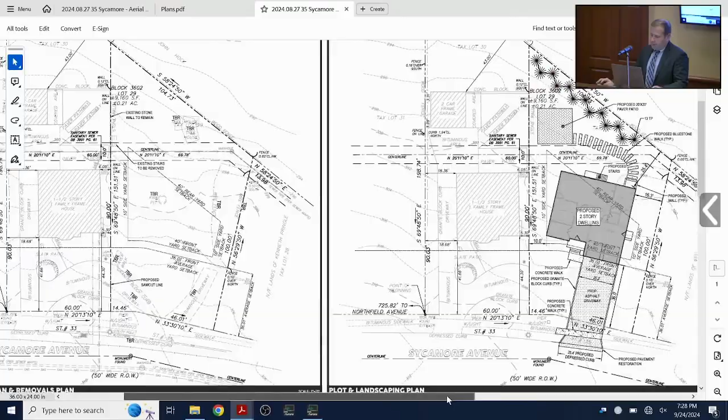As far as the proposal, moving to the second viewport showing what's being proposed as part of the construction, we are proposing a 2-story single-family dwelling with an attached 2-car garage in the front of the house facing Sycamore Avenue, with a driveway 2 cars wide and approximately 20 feet in width. There is a small porch and steps down to the sidewalk to the driveway. In the rear is just a landing and stairs from the first floor down to grade, with stepping stones and an on-grade paver patio in the rear yard on the opposite side of the sanitary sewer easement.

As part of the application and submission, we designed a stormwater or dry well system per the township regulations, and that's going to be subject to review by the town engineer as part of their review for grading and drainage.

One of the changes we made since the original submission was planting 13 arborvitaes staggered along the rear property line. We did as much as we could, but we can't plant within the sewer easements, so that's why the landscaping stops right there.

For relief on the property, we're asking for 3 items. One is front yard setback. The code for the R3 zone requires a 50-foot setback. However, there's a provision that if there are houses within the area, you should use the prevailing front yard setback, which is 36 feet in this case, 36.01 to be exact, but no less than 40 feet. So 40 feet is what governs per this lot and the surrounding houses.

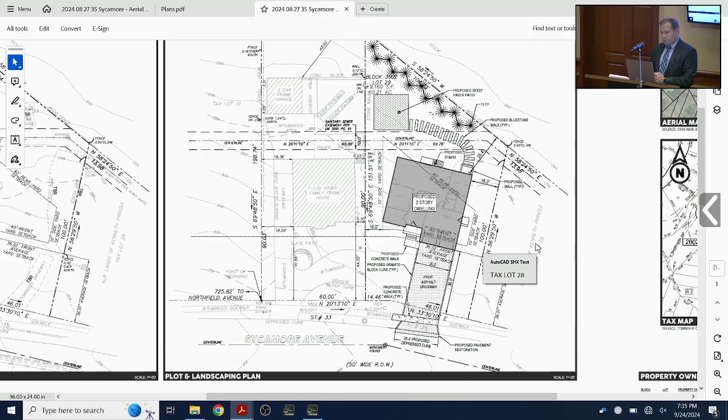So is it your testimony then that by moving it up as much as you have, in amending the application, it is in conformity with the other homes in the neighborhood, and though technically you might be able to move it up further, it would not look appropriate, is that correct? That is correct. So is it your professional opinion that where you have sited the house now would be the best location in terms of the front yard setback, is that correct? That is correct, yes.

And you're familiar with the site, correct? Yes, I am. And you're familiar with the objector, the Pearlson's property to the rear, correct? Yes, I am. And that property already has a pretty significant buffer of evergreen trees, correct? Yeah, I believe there's evergreen trees on the side of the back of the property along the driveway.

But even given that, you showed the board where you've amended the application based on communications I've had with the objectors' counsel, that the applicant has also agreed to install an additional landscaping buffer, correct? Correct, of 13 arborvitaes.

Okay, I have no further questions. Thank you very much. You're welcome.

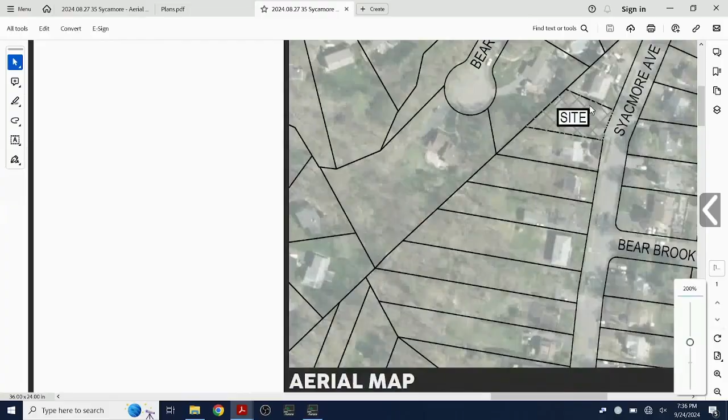Does anybody on the board have any questions for this witness? Could you point out where the objector's property is and where the current buffer is, and where you'd be putting an additional buffer? Yeah, so right now, it's right here, and I'll see if I could zoom in on the aerial as well. That might help. So as you see here, here's our subject site, and this is the neighboring property to the rear, and this is the evergreen trees that we were discussing.

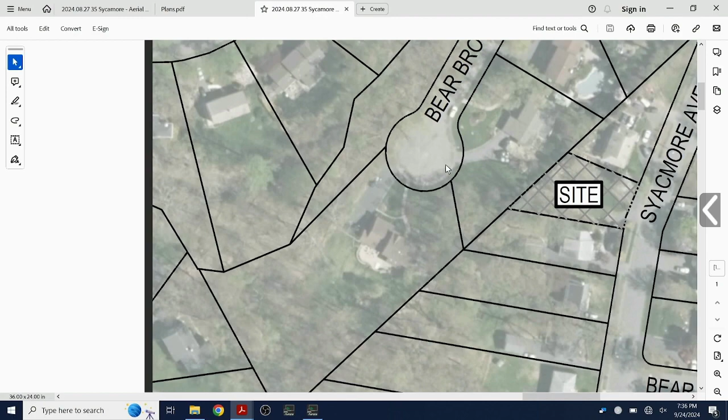So the house is going to be sited pretty much where it shows the site is where the house would sit. Actually, you know, I have another exhibit, I believe this was submitted as part of the exhibits. This is an aerial exhibit where we overlaid the house on the aerial. Did I do anything? There you go.

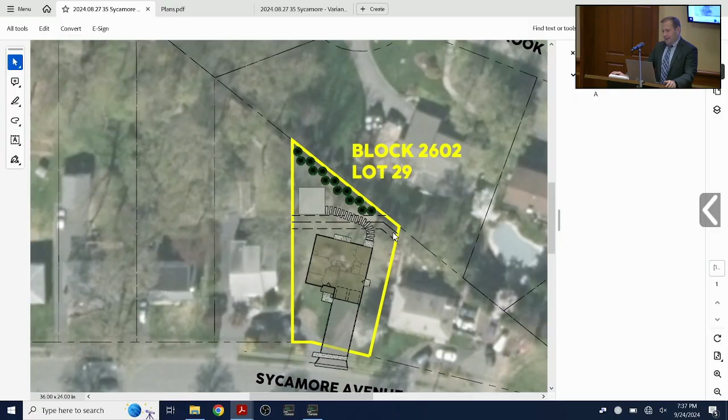And you can see how that is in relationship to the neighboring property behind us. So again, you have the evergreen buffer on the neighboring property, and then the evergreen that we're proposing on our property as well. Okay, can we get that exhibit back up? Oh, it's not up there? It's not, yeah. Just for the record, that we did submit that as part of the application.

Yes. And you prepared the exhibit that you're testifying to now, the aerial? That is correct, yes. Okay, and the yellow line shows the property line that's the subject of the application, correct? Correct, yeah. And maybe you could just show the board where the Pearlson's home is? Back up, yep. So this is the dwelling, and this is the lot.

And you wouldn't dispute that that's an irregularly shaped lot, correct? That is correct, yes. And it's an undersized lot for the zone as it exists today, correct? Correct, it's about two-thirds.

I got a question, Ed. Please. So just based on this aerial view, the house to the right is actually situated much closer to Sycamore? It does appear that way. So in theory, the house could be moved forward - I know you use the average of the lot, but this is sitting closer on the left side? So from the aerial, the numbers we got were from the actual survey, where the surveyor picked up the dimensions. Sometimes aerials can be skewed because of how they're taken - they're not directly taken 100% straight up. So the 36.01 came from the survey and the surveyor. Okay.

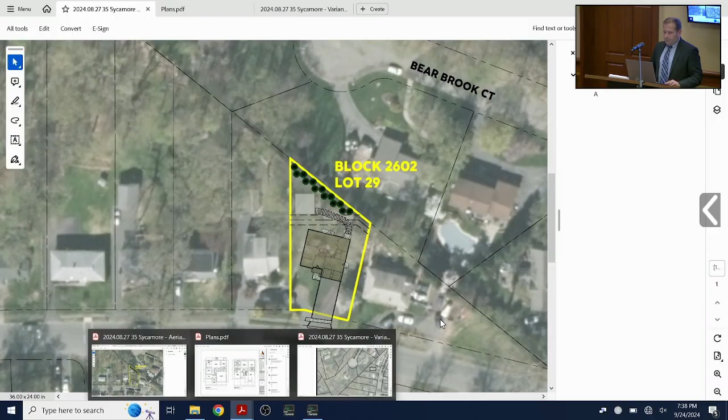Anybody else have any more questions from the board? Is anybody... oh, sorry.

Please, in terms of the surveys depicted on your diagrams, if I missed this, who prepared those surveys? That was prepared by Casey and Keller. Do you know when? Recently, within this year. I think the survey, it's there. There's a Casey and Keller Land Title Survey that was submitted initially.

It was prepared by Mr. Lanzafama. Is this the same survey? The one that I have doesn't show the dynamics, but that's who prepared the surveys, correct? That's who prepared the original survey and the subdivision as well, and they accurately depict what's there and what's intended to be proposed. Correct. Thank you, I have nothing further, Mr. Chairman.

Does anybody in the public have a question for this witness? Please come forward. Let me explain, we can question each witness, and at the end you can make a statement, okay? We've got plenty of time to do that. I'm leaving to pick up my daughter from the airport.

I just wanted to get on the record, even though I know it's confidential, I approve of the engineers. No, we just can't do that, there's a format. Well, good luck, so thank you. Sorry, so sorry. Not a problem, have a great, safe travels.

Hi, good evening again, for the record, Lisa John Bassa. Mr. Manillo, right? Correct, thank you. As was stated by Ms. Durkin, there was an application filed in 2019 before this board in connection with what was thought to be illegally created 35 Sycamore. Were you the preparer of that plan filed in 2019? No, I was not.

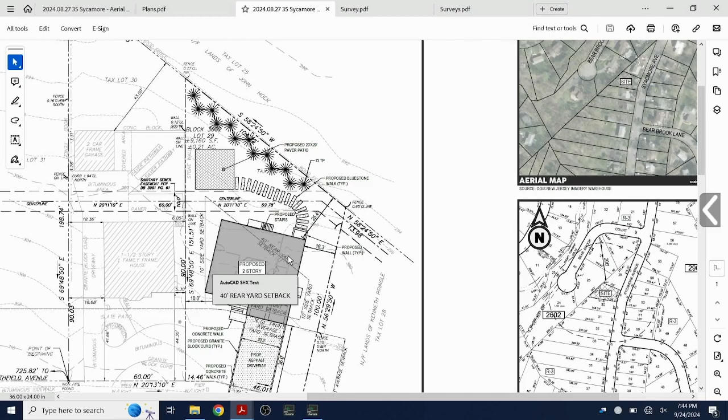So the dimension of the 25.4, can you point out where that is with your cursor? Yeah, so that's the top right corner of the house, that's the closest distance to the property line. As you move further away, the distance increases, where it's actually in conformance at the left corner. And there's a square box right outside the house, I believe referenced as a wall, what is that? That's a patio that comes out to grade. And what is the distance of the patio to the rear yard? I don't have that dimension, but it's probably roughly 20 feet.

So is the rear yard then less than the 25.4 being proposed? No, I believe it's still 25.4, it's measured to the actual building, not to the patio. What is the dimension to the patio? I could scale it for you, but I don't have that dimension right here. That would be great if you could do that. Yeah, and I'll report back to you on that. That's not a problem.

Okay, because it appears that there's actually a lesser rear yard setback than what is being shown on the plans by the dimensions. So it would be great to know what that is, what that patio area is. Do you agree with that statement, Mr. Manilio? To my recollection, I don't believe the rear yard setback is measured to the on-grade patio.

There is a requirement within your code related to patios. Are you familiar with that code section? There's a section that relates to patios that are attached to homes and their distances. Are you familiar with that provision? Not off the top of my head.

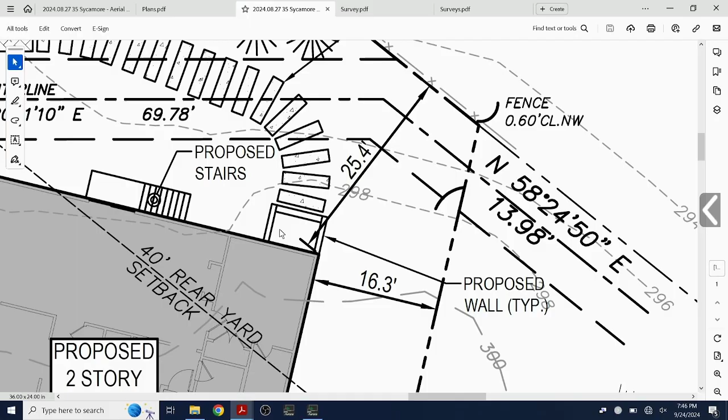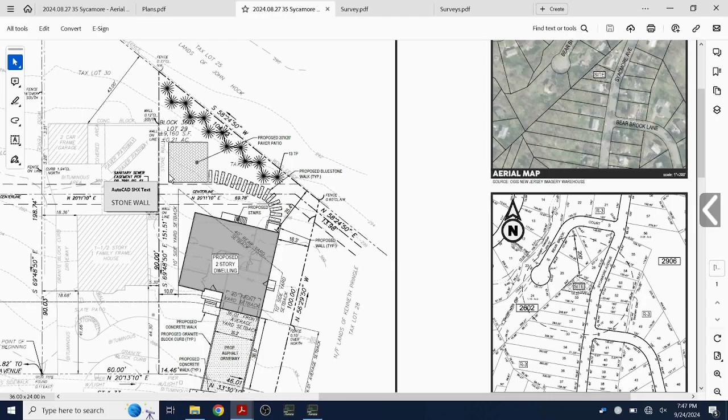On your plans, if you can zoom out again, there's another, it looks like another patio, that square block to the rear. That is correct, yes. That's a second patio on the property? Well, the first one's not a patio, it's really a landing that comes out of the doors, but you can call it as you wish. And how large is that patio? I believe it's 20 by 20. So that's 400 square feet? About. That is correct.

And what is the closest distance of the second patio, or the rear patio, to the rear? I don't have a dimension on the plans. I could get you that dimension and report back to you by the end of the meeting. And do you know the distance of the patio to the side yard line? I do not.

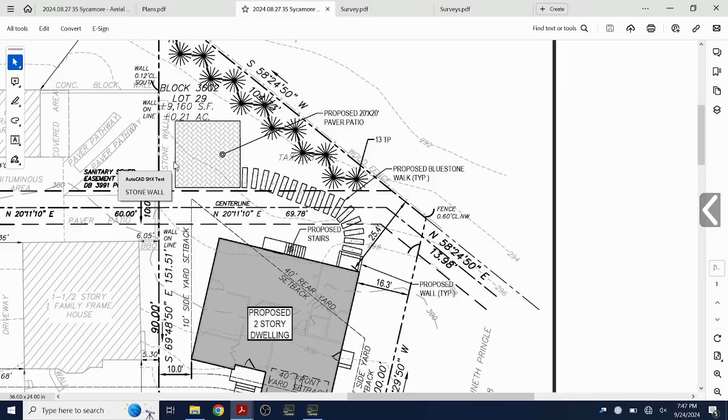Are you familiar with the township definition of accessory building? Off the top of my head, no, I don't have it memorized. The definition section of the township code states accessory buildings, and I'm quoting, subordinate building or structure on the same lot with a main building. Consider a patio. Would you consider the patio a structure? No. It's not a structure? No. What is it? It's on-grade material. It's like calling a driveway a structure. And you don't believe that a driveway is a structure either? No.

Rear yard. Let's go back to the rear yard. I believe that you stated in your testimony that the rear yard setback could not get larger. I don't recall saying that. Could the rear yard setback get larger from an engineering standpoint? Yes, the house could be moved forward. There's different ways that it could be increased. Could another alternative be that the house be reduced in size to create a larger rear yard? Correct, or, yeah.

And you also, I believe you also said that the house or the rear yard was in character with the surrounding properties, is that right? I did not. I said the front yards were. Can you flip to that aerial photo that you showed previously? Sure.

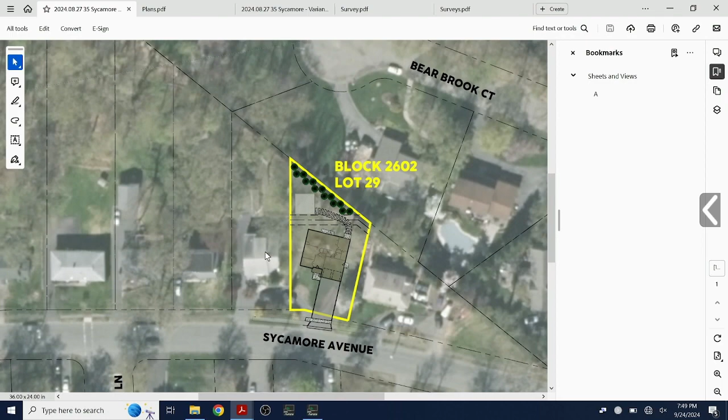I mean, it depends on how you classify character. I would say that the rear yard's in line with the neighbors to the left, or to the west. Then where you see this, the property does kind of turn, and that property line gets smaller as you get closer to the intersection of Bear Brook.

So the lots, just from the screen angle to the left, would you be able to dimension roughly how large those rear yards are from the principal building to the rear lot line? No, not off this drawing.

Based on just the view of the eye, does it appear that the existing development on those lots have much larger rear yards than what's being proposed in connection with the subject application? Yes, but I will also say that those lots are a lot deeper than this lot as well. Right, I would agree with that assessment.

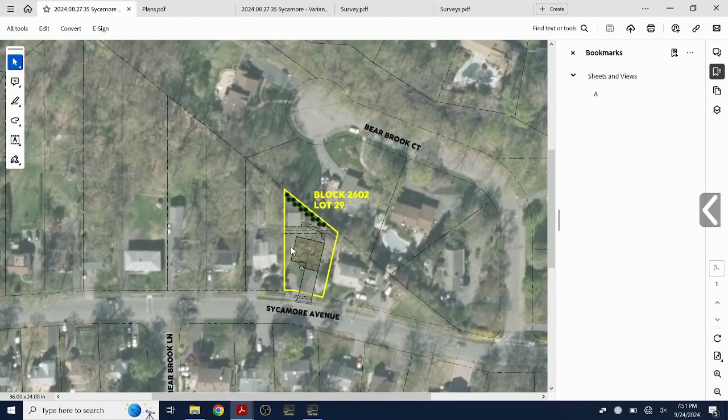And also, that would relate to both the principal buildings as well as any sort of accessory structures or patio features, is that correct? That the rear yards of those existing homes, the built-out homes, are larger than what's being proposed here?

I'm still confused. You said something about accessory structure and patio, I just want to make sure we're clear. I know you're not calling it an accessory structure, so I reworded it. Okay, referring to the patio that's being proposed in the rear of 35 Sycamore.

I'm not trying to be difficult, I just don't understand what the question is. I think you already answered that what is being proposed is not in character with the remaining rear yards. I don't believe I said that. Okay.

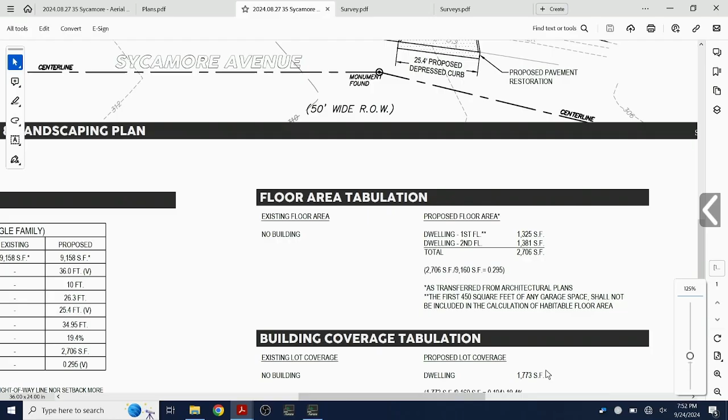For your building coverage calculation, I don't know if I heard you say what is the footprint of the proposed home, or how was the building coverage calculated? Let's get that for you. So we came up with 1773, and that includes all the roofed areas. Okay, so that was the total building coverage.

Correct. The patios and patio areas are not included, correct? That is correct.

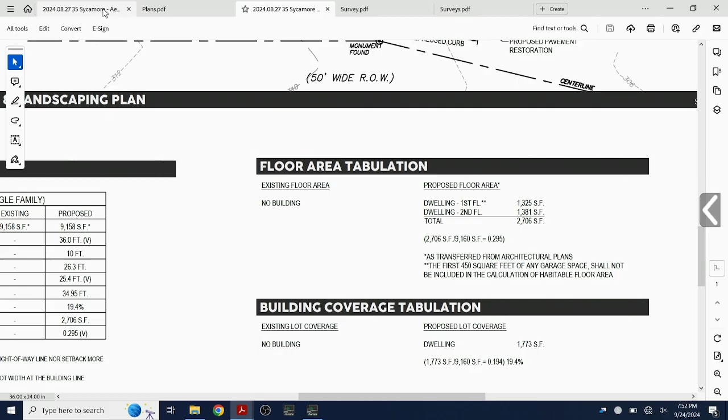The grading of the lot, can you just discuss generally how the grading is on site? Yeah, so generally the site right now grades from Sycamore towards the rear of the property, and it is going to be maintained that way in the proposed conditions. Do you have your grading plan? Yeah, I was just looking for my full plan here. I couldn't find it, I believe this might be it.

Yeah, so with the exception now, the driveway is grading towards Sycamore, and the remainder of the lot is still grading the way that it was before.

Is it, it's hard to read from here, but is it around a 308 elevation in the front, and then it slopes downward to around 294? That is correct. Okay, so there's a difference in grading of about 14 feet, which is existing and proposed, correct.

As part of the development, is any soil or soil-moving activities being proposed on site? Yeah, in order to build the dwelling and the improvements, some soil movement will have to occur.

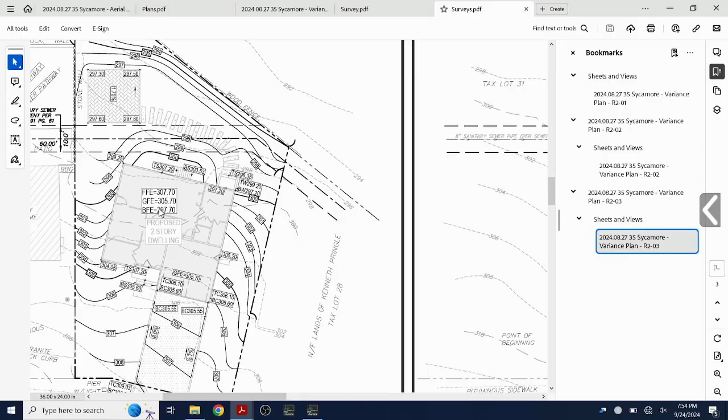On sheet 3 of your plans, it had some figures related to the soil-moving activities, that the lot area itself is 9,160 square feet, and that the lot disturbance is 9,461 square feet? Correct. So that includes also disturbance within the right-of-way.

Okay, so the entire site will be disturbed? From the plans, I don't know if you can see this line right here, this rear corner is not being disturbed. Okay, but the vast majority, including the right-of-way, is going to be disturbed? Correct, yes.

Is any soil going to be brought on site to construct the home? It actually should be an export with the basement, so no, there should be no import.

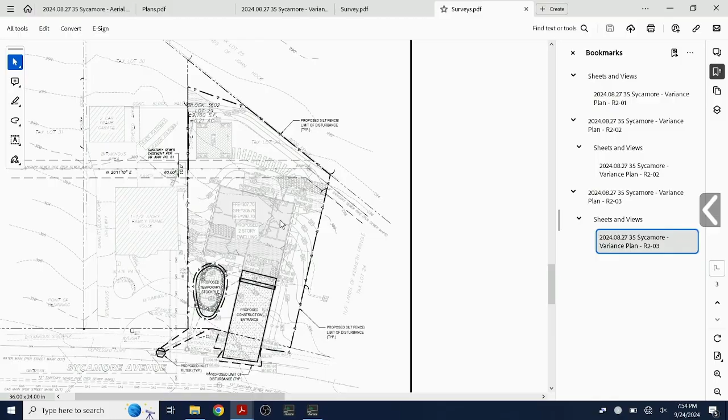Okay, also on your plans there was a calculation related to building height, that 35 feet is required, and the proposal is 34.95 feet. Correct. On a prior iteration of your plan, there was a picture on sheet 1.

There was a diagram that showed how the height was measured. It's missing from this plan. Is there a reason why it's missing? I don't know why it's missing, but we could definitely add it back to the plan if it is a requirement or a condition of approval, not an issue.

Do you know if the height was measured from current grade or after the soil moving activities occurred? It was measured pursuant to the town's requirement as far as average grade, I believe at the four corners of the house. So it's before the soil moving activities occur on site? To be honest, I need to look at the calculation, but I know it was done per the code, and that's up to the town engineer or zoning official to verify.

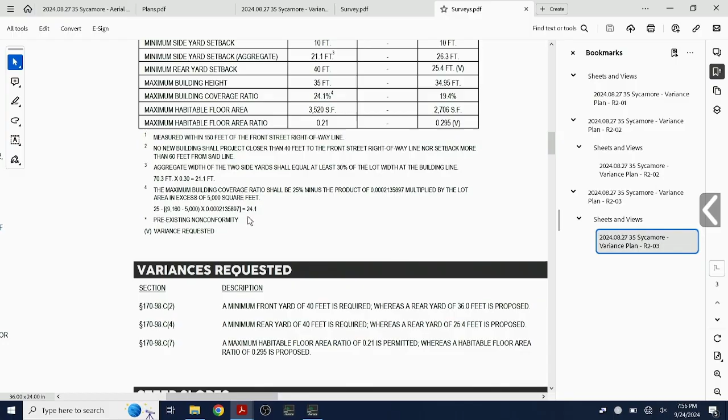Before the board acts on this, I would ask that a plan be shown how the height was measured, because per the township code, it requires that the highest point of the building be measured from the average of the original grade. Since we're so close to the maximum permitted height, the board and the public should know that answer before granting an approval.

I just want to state that we are proposing a conforming house as far as building height. If the board wishes, we have no issue showing those calculations and showing that it conforms as a condition of approval. If it doesn't work, we're going to lower the house to be in conformance. We're not asking for a variance on building height.

But there are plans on file with this board, and we need to make sure before the board grants an approval that there will be conformance with the maximum permitted building height, that the plans fairly represent what is actually going to be built out there. But that's a statement, not a question.

If I might interject, is there any testimony going to be offered this evening with regard to that height, other than this? No, we're not seeking a height variance. No, but I'm talking about the issue raised by the objector's counsel as to how it was calculated. So when I have a chance, I could take a look at the calculations in my files and verify, but it's not on the plans as far as how it was calculated.

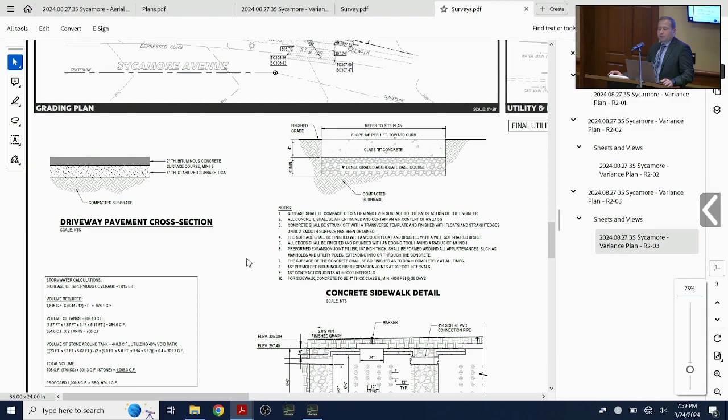Impervious coverage. What is the proposed total impervious coverage proposed in connection with the application? Give me one second. So again, I don't have the total. I have the increase from what was existing on the site, which is about 1,800 square feet increase in impervious coverage. I don't have the total. I believe that's not a requirement per the zone.

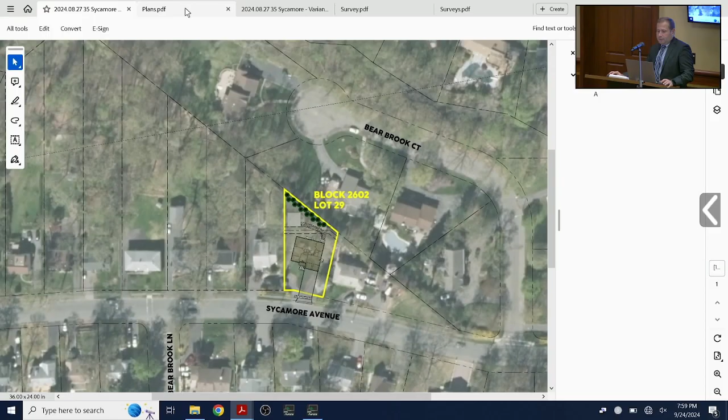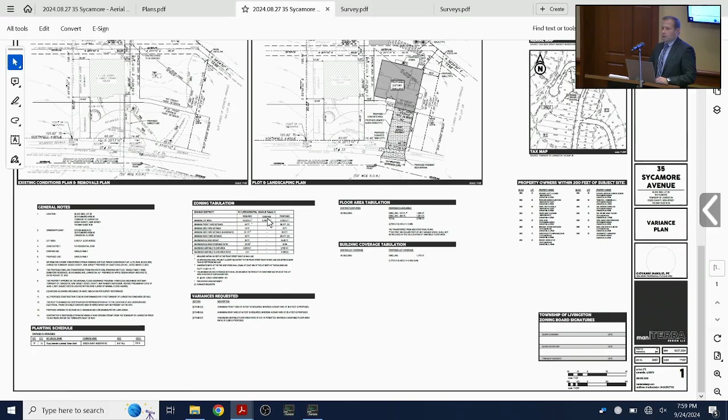Are you familiar with Code Section 170-72C that requires a drainage plan be submitted for any approved addition of impervious surface of 300 square feet or greater? Yes. Did you prepare a drainage plan? Yep, it's sheet 2. It has the drainage calculations and drainage plan, and we stated we would conform and be subject to review of the town engineer.

Tree removal, I just want to make sure this is accurate. Based on the survey, it didn't appear that there were any trees being removed, is that correct? That is correct. The landscaping being proposed, which is appreciated by the Pearlstons, I see it's 13 green giant arborvitaes, and it says 6 to 8 feet tall. Is that at planting height? That is a planting height, correct.

You also mentioned there was a dry well system being proposed for drainage or rain collection. Is there any maintenance issues with those types of systems? Do they get clogged often, do they have to have regular maintenance, do they have to be inspected? As far as clogging, no, not usually. All they collect is usually the leaders from the roof, so it's clean water as far as clogging is concerned.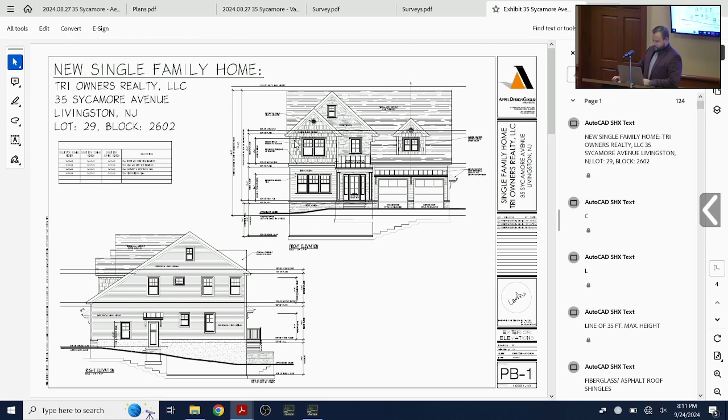Some of the changes on the elevation, you can't really tell on the front, but the left side of the house with the 2 large gables was pushed back to help reduce the square footage. These rooms are not overly large. How do you zoom in?

A 2-car garage at 21 by 20 is about as minimum as I would suggest for a 2-car garage. A study at 8 by 12 is not very large, just enough to maybe have a little home office. The dining room, also at 13 by 12, is not overly large. The rear area is larger, but width-wise at 14 feet, it's once again not a huge space. A guest room at 12 by 11. Upstairs, once again, the bedrooms are around 12 by 12, 13 by 13. The primary bedroom is 15 by 16, has a primary bathroom and a walk-in closet. Nothing here is, I feel, overly large or grossly exaggerated for space.

I work on a lot of multifamily buildings. These are about the same size as the bedrooms and primary bedrooms we do there.

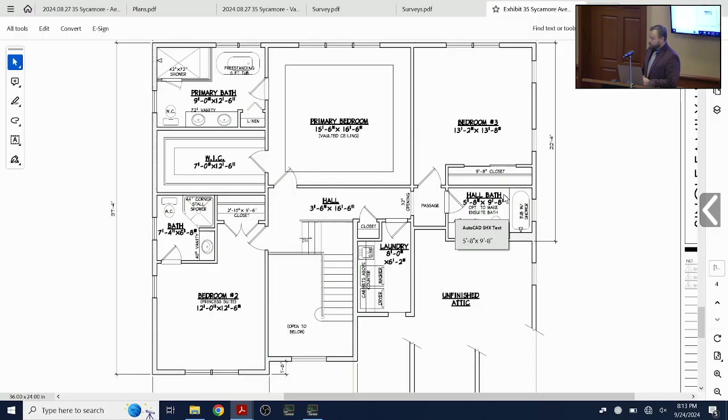Here's the rear elevation. As was testified, this is a 2-story house according to the town definition, and also would be considered a 2-story house per the International Residential Code, where it's measured from average grade. From that average grade line, you can't have your floor more than 6 feet above that, which we do not, so this is a basement and a 2-story home.

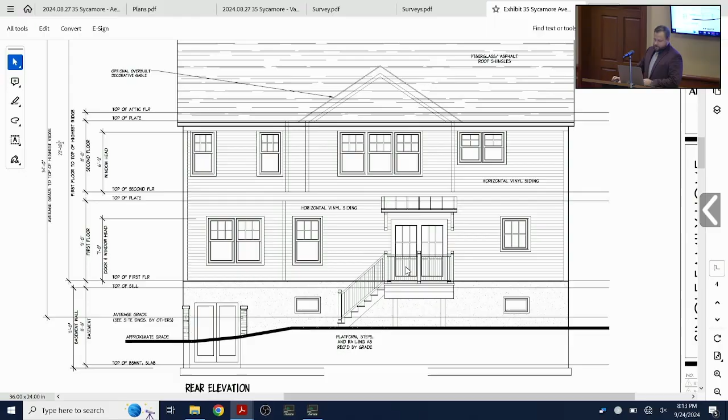To testify to the character, I do not believe this is out of character for the area. The homes to the left and the right, I believe from the front, are single story-looking homes, whereas this is a 2-story home. But I do not believe that this home is out of character for the area.

Excuse me, Ms. Durkin, is that document part of the package that's been submitted to the board, with the coloring in the house? Yes, it was submitted to the board. Is that in the most recent submission or the prior? This was — we've never updated this rendering, so it was with the prior submission. It's just to show the materials, correct? Correct, and you wouldn't be able to tell the changes we made from this elevation anyway. Would you be kind enough to resubmit that after the hearing, please? Not a problem, so that we have a copy, because I'm not sure it's in my package — maybe it just didn't make its way in. Okay, not a problem.

So in your professional opinion, the proposed home would fit on this lot appropriately, is that correct? Correct. And the home, once it's built, would fit in with the character and scheme of the neighborhood? Yes, that is correct. And from an architectural standpoint, you don't see a negative with this proposed construction, do you? No, I do not.

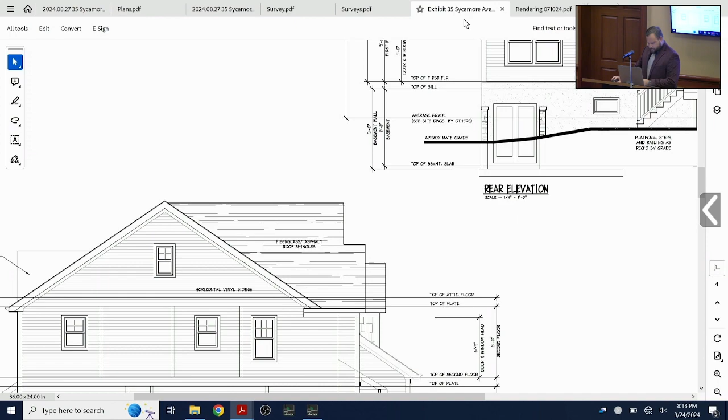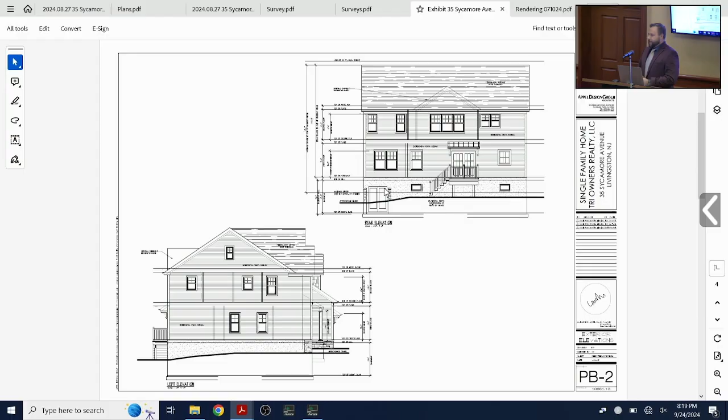Can you go back to PB2, please? So in the top picture there, towards the bottom left, is that a walkout basement or what is that? Right here? Yes. Yeah, it's somewhat of a walkout basement. We have to create an areaway, and that's what the walls are on the site plan, to keep back the grade so that you can walk out of the basement. So those are some sort of sliding glass doors or whatever? Yeah, it would be a sliding glass door, or French doors. We didn't get that far into picking things, so. Thank you.

Mr. Chairman? Yeah, just going back to the attic, I'm confused between these current plans and the ones before, because you seem to show the same heights for the first floor and second floor, but somehow the house has shrunk to 34 feet from 34 feet 2.5 inches, yet you've increased the distance from the first floor to the highest point of the ridge. Did we? Yeah, because it was 29 feet 3.5 inches, and now it's 29 feet 10 and a half inches, and I don't know why that's different. Before it was 29 feet 3 and a half.

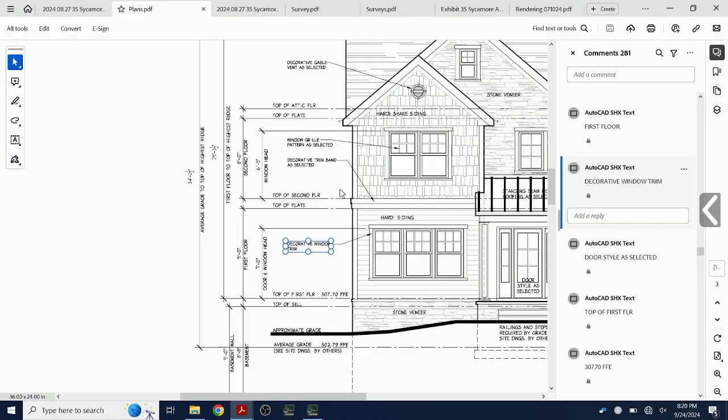Oh, that's just, I'm not sure why that is, because we did not increase roof heights or anything. In fact, by shrinking the building slightly this way, that should have reduced, not gained, so I don't know exactly why those two are different. Because in either case, you're talking about a roof where the height from the ridge to the attic floor is anywhere from 10 feet 2.5 inches to 10 feet 10.5 inches. You're almost talking like a stand-up attic.

Well, you got to understand there's collar ties in there too, so understand those are going to cut down the head height. We don't have a stair up to that attic. It's not, we don't have one.

But one could be added, and you do have an unfinished attic on the second floor that could easily, obviously, you would have the height now of double height. So because you have the height of the second floor, then also going up to the attic... well, it wouldn't be double height. You're stuck with the roof line. You can't have a double-heighted space in that room over the garage.

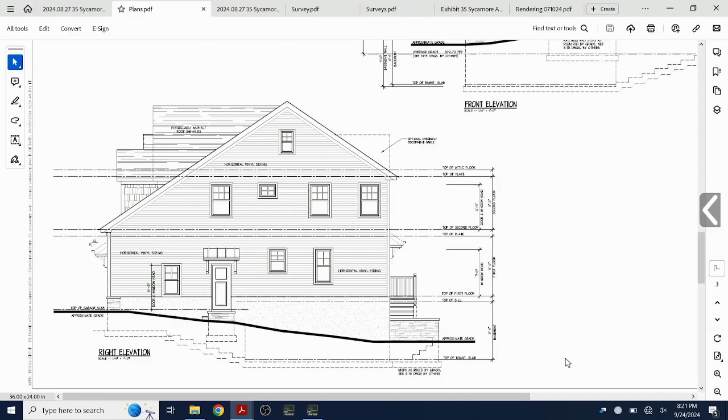But couldn't the only reason the roof is that high also be because you have the double gable in the front, with that window? Without the double gable, we could lower the height. The window is just into dead attic space. It's just put there, so it's not a blank elevation right there. I mean, that window could be a little gable vent or anything like that. It was just decided to do a window.

Once again, this is not a habitable attic. There's no egress stair up there. There's nothing going on up there. I mean, if you want to talk about possibilities, anything's possible. I can't testify to what we didn't do.

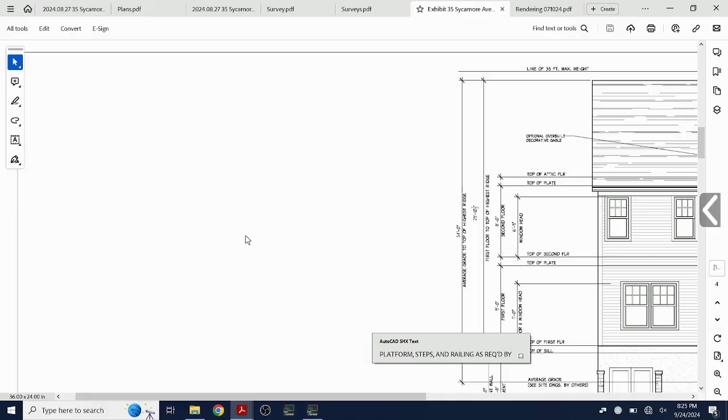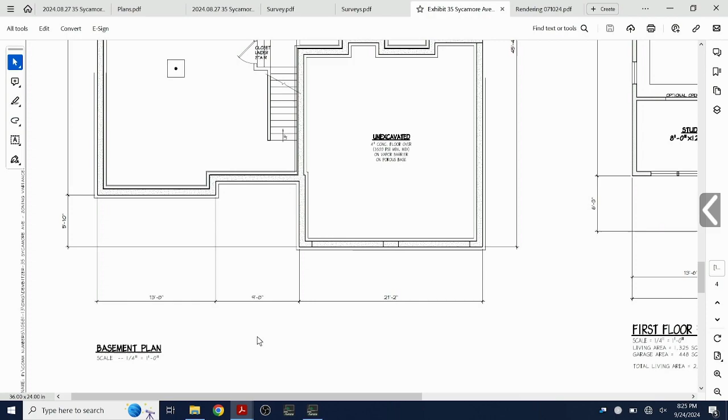No, but it's probably still around 1,300 square feet. Because it's not underneath the garage, which is 448 square feet, but it's under the rest of the dwelling. So the basement area being shown right now is approximately 1,300 square feet. Somewhere around there, yes.

Do you know the ceiling height proposed in the basement? Yes, 8 feet, or 8'8" to top of sill. Given the height and size, is this an area that can be used for a TV room, a workout room? It's usable space, absolutely, yes.

The first floor plan, please.

I believe you went through the rooms, but can we just go around again and identify what the rooms are? Sure. As you walk in the foyer, to your left is a study. Right behind that is the dining room. Behind that is the kitchen, which is open to the family room. Beyond the family room is a guest room with its own private bathroom. Below that is the two-car garage, which you gain access to the rest of the house through a mudroom.

And with the garage, based on the township's calculations, there's a portion of that garage area not included in the FAR calculation, is that right? That is correct, 450 square feet, I believe. It says the first 450 square feet, so anything beyond that is included. So those 450 plus the 1,300 in the basement, they don't count towards the habitable area included in the FAR calculation? I believe the basement does, I thought. Didn't it? Does it? It does not? No.

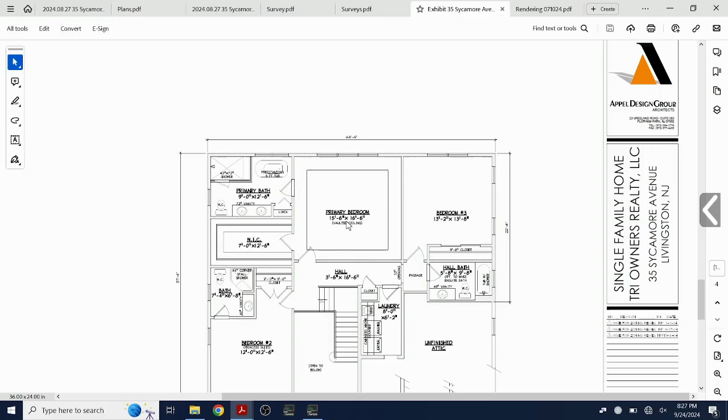And then if you can move on to the second floor plan and walk through those rooms again? Sure. As you come up the stair from the two-story foyer, right ahead you'll have bedroom number 2, which has an ensuite bathroom. To the right of that is the primary bedroom with a primary bathroom and a large walk-in closet. To your right down the hallway is a laundry room, and then bedroom number 3. And then at the end of the hallway is a hall bath.

And you're saying it's bedroom number 3, but in fact, how many bedrooms are being proposed? Oh, there are 4 bedrooms. This is bedroom number 3 on this floor, with the guest room on the first floor being the 4th bedroom.

And the last reiteration of the plan filed with the board, I want to say it was August 27th date - what's being labeled now as an unfinished attic, that was previously a bedroom with a walk-in closet, is that correct? That is correct.

And it was relabeled for what purpose? To reduce the square footage of the house, the livable area of the house. But the house itself didn't actually shrink - it was just based on math, based on the township code, is that right?

No, the house did shrink some. We reduced the front setback, the front bedroom area. I believe we brought this whole area in 2 feet. I don't think we brought the back in at all - I think it all was right in here. This laundry room got a little bit smaller, so we did reduce the overall footprint slightly.

I'm sorry, the area now called unfinished attic, which was formerly labeled bedroom number 4, did that space reduce in size? Somewhat, because of just getting rid of the room, the roof slope and everything like that. It did and did not, kind of not. I forget how big that bedroom was - I think it was 200-something square feet, so that came out.

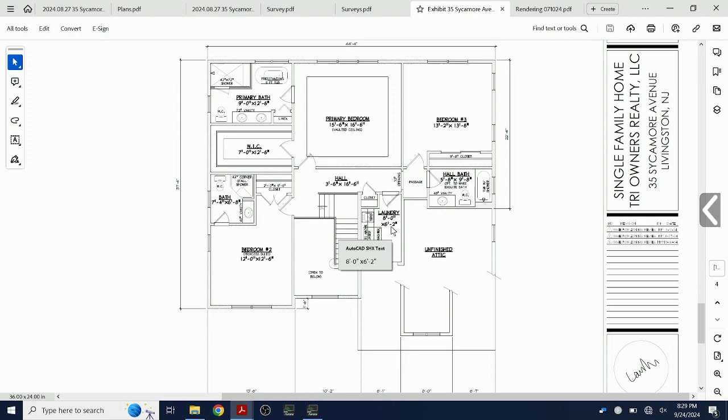And up until the time you presented this exhibit today, that unfinished attic area actually qualified as an attic under the township code, is that correct? Correct. And why was? We had a door. What's the difference? We had a door going into it, so it was part of the second floor - you could just walk right into it. So we got rid of that door and put an access hatch to the attic.

And from an architectural standpoint, would it be easy to convert it back and have a door? Yeah.

Would the applicant, if the board were inclined to even grant this application, be inclined to, as a condition of approval, not put another bedroom within the house? Well, it wouldn't be so much as putting a bedroom, but you put a bedroom in there, now you're over your FAR. Right, but a lot of things happen in houses without boards knowing about it. True.

So I'll take that as a no. What do you, as a, if the board imposed a condition that there wouldn't be another fifth bedroom, is that something the applicant would agree to? I believe so. He allowed us to remove it now, so I don't think he could put it back. We couldn't put it back as the architects without coming back to the board for more square footage.

And there's also, aside from this unfinished attic on the second floor, is there also another attic? I just want to make sure what we're trying to get here, because the zoning is about the restrictions of the front yard, backyard, front setbacks. So why are we going in detail? Because there's also a requirement of habitable floor area, and that's precisely the questions I'm asking. He's already shown what the habitable floor area is, right?

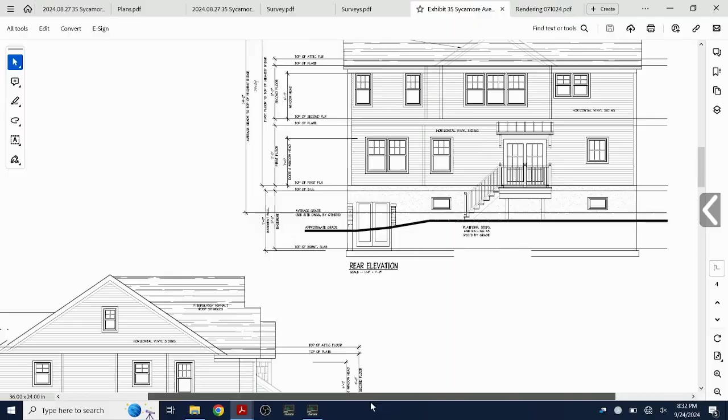Well, there would be an attic above this floor because of the roof geometry, but there's just an access hatch up there to get up to the attic. Two attics in the proposed house? It's one big attic, but you could call it two because you're seeing them on two different levels. Let me show you. So the attic located above the garage at the second floor would be this space right here, and then the normal attic of the house would be this space up here.

Would it be possible to remove the top floor that's proposed? You mean up here? Yes, without going to a flat roof? No, if you want a flat roof house, then yes. I'm assuming there's a way to redesign the roof or take off some of the massing on top if there's another attic space. Of course. Yeah, okay.

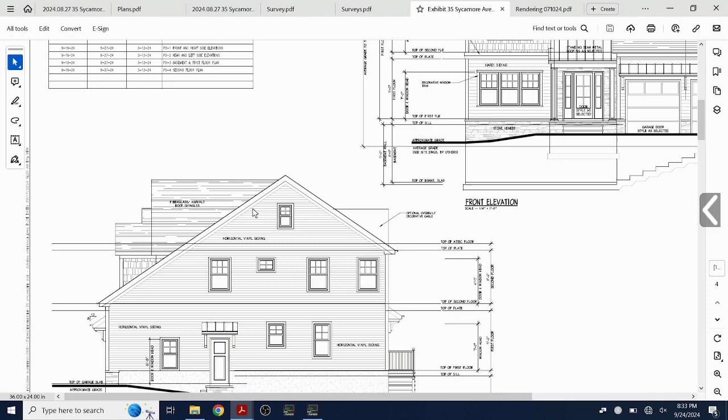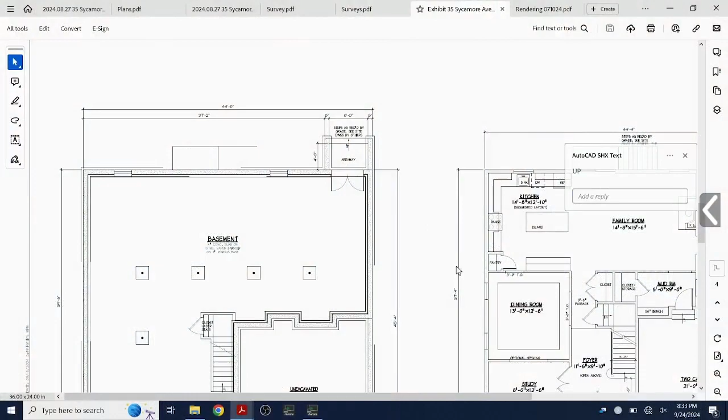And then a question was thrown your way related to the patio area. There's a patio area - I'll talk about the one that's attached to the house. Areaway. I've never seen us call a little areaway out of a walkout basement as part of a patio. You're not having a party there, you're not putting a chair there. That's what the engineer called it, so that's what I was referring to.

What is an areaway? It's just a small space that allows you access. Is there pavement or any type of pavers there? There's got to be - I mean, I guess there doesn't have to be. You could walk right out onto grass. You don't have to have any kind of pavement there.

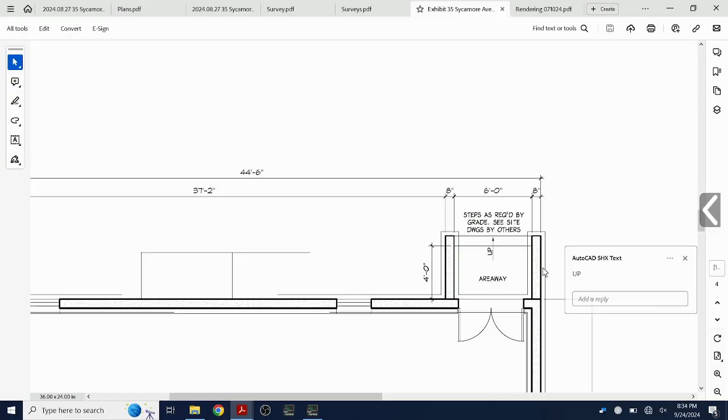Excuse me, as my colleague said, if there's a reason for these questions about the patio, let's move on - is there a reason for asking about the patio? Yeah, it related to whether the rear yard setback was measured from the area I'm referencing or not, because there's a provision in your code stating there shall be a rear yard of at least 40 feet, except that an attached sun deck or patio may extend into the required yard for a distance of 10 feet. If that was in fact a patio, it's in a yard that's less than what's permitted, so I would submit to this board that the rear yard setback requirement is measured from the patio. Okay, so we'll take note of that. Thank you.

You made statements related to the character of the neighborhood and the homes. Have you done any survey related to the square footages of the homes on Sycamore, particularly on the west side? That's not mine, I can defer to the planner, but statements were made by this professional that it was in character. I was just talking about the aesthetic of the elevation, not square footage. Materials, colors, look of the house. Okay, I'll reserve that for the planner's comment.

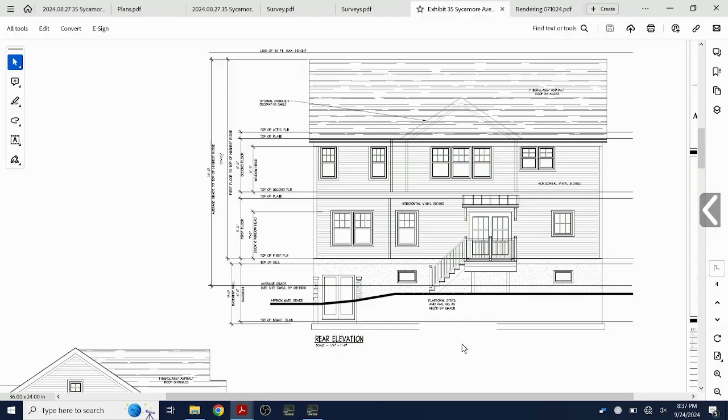Does anybody else in the public have any questions for this witness? Anybody else on the board? Okay, I turn it back over to you.

I apologize, is it possible that we can take a 5-minute break? You're already running much late, Mr. Chairman, I'll give you that. Okay, we're in recess for a few minutes. Jackie, we should have a time limit on the case going forward.

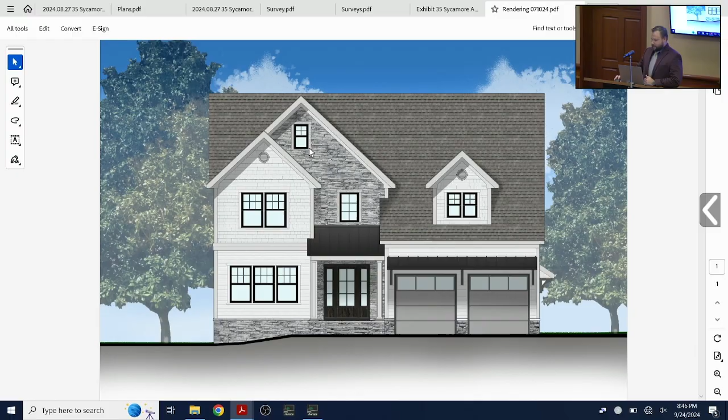We could delete this little dormer, lower this garage roof, or maybe change it to a gable, and get a wall here to reduce the massing. This massing can be reduced if we change the pitch of the roof, you don't want to make it too flat, but we could play with the pitch to help reduce that. We could take out the windows around the sides up in the attic and just do gable vents so it doesn't look like there's a habitable, livable attic up there. So yeah, we're open to that.

What about the restriction on the height? We could come down, if we change the pitch of the roof, we could easily come down a foot and a half to around 33.6 or so, to make sure we are under any ordinance height.

Okay, thank you. Anybody want to make a comment on that on the board? I guess the only other comment I would make, that's great, thank you for reducing the height.

My only other concern would be, depending on what you're talking about doing, that space that says unfinished attic, as you said, things could be done. Would you also consider deed restricting that area so it can't ever be living space? I don't own this, I can't deed restrict anything, that's up to the owner. What we've agreed to is a condition on the approval of 4 bedrooms.

Like I said, you can't, and when we get a building permit, it's based on those plans. I'm talking about the future, because that room could always be changed. But they would have to come back before this board, they would have to get a permit, or that would be pretty difficult. If you're doing work illegally, yes, you're doing it illegally, correct. No one could stop that.

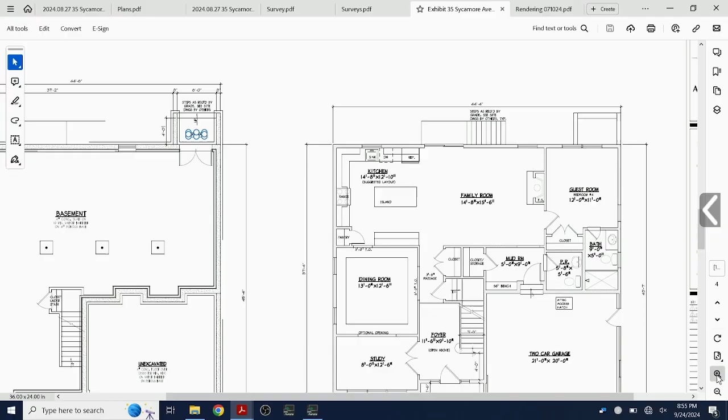Okay, thank you. Anybody else? We're good? I think that's pretty clear.

What about pushing the whole house farther forward? Does anyone have an opinion before I chime in on moving the house a little further forward? Well, I think it makes sense for it to be equal with the neighbors—it looks funny if it's pushed out. It'll increase things—there's two neighbors, one's a lot further out than the other.

The question is whether you set it in the middle between those two setbacks as opposed to the neighbor to the left. I want to make sure my fellow board members understand that'll change the front yard setback to a greater number, but if we feel it's giving more relief by moving the house forward, then I think that's not a bad idea. Everybody, yes or no? Okay, that was a good point.

Okay, thank you so much. Thank you very much, Mr. Chairman and members of the board, thank you very much. We'll see you in November? Before that, wait—

Just want to get a sense of when we can expect the revised plans, because I've made the decision to send this application to the town's planner so that we can get a review memorandum done, so that everything—the variances—can be articulated and opined on by the town. I know we do have a zoning denial letter, and we also have the engineering memo, but I think it would be a good idea to have a planner's memo.

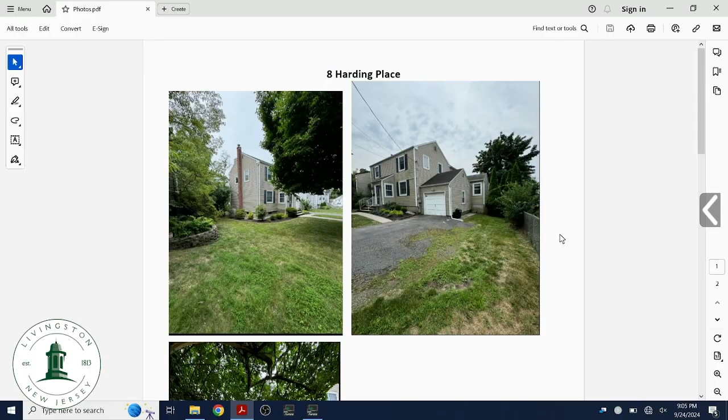We're just adding 450 square feet, just the master bedroom above the garage. The ratio, if it changed, I'm not sure. Yeah, the habitable ratio is...

3.04% variance - proposed is 33.04, required is 30%. And your existing lot size is undersized for this zone? I don't know the exact threshold, but I think the lot is 7,292 square feet. It's on the plans. So you have an undersized lot, and you're going a little bit over on the habitable floor ratio, right?

Yeah, that's correct. And if this was a full-size lot, you probably wouldn't be coming before us for this, is that correct? Yeah, correct. Okay, thank you.

Does anybody have any questions for this witness? No. Did we say it was 7,501? I just looked it up - I saw 7,500 on the building area calculation. Okay.

Your son? Yes. Would you confirm that, in your opinion, there's adequate capacity here if you make these changes to accommodate what you want to do? Yeah, and that it's consistent with the neighborhood. And that any benefits granted to you by approval of this outweigh any detriments? There are no substantial detriments to anything. No. Thank you, that's all I have, Mr. Chairman.

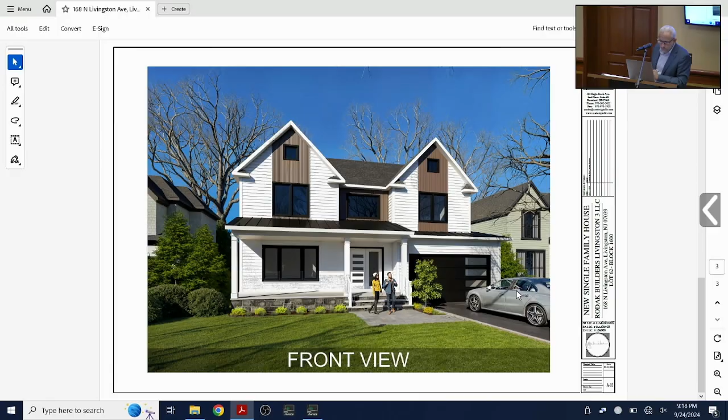Now, regarding the building height, we are required by code to be 35. Our height is 32.20, so we're almost approximately 3 feet below the required building height. I want to also mention that we have the first floor at 10 feet ceiling, the second floor at 9 feet, and the basement at 9 feet.

I would like to mention that the basement is not accessible to the outside. We don't have a walkout basement. It's just enclosed space.

Lastly, I'd like to mention that the attic, there is no livable attic, just unfinished space accessed by a pull-down stair. No access, no egress to the attic.

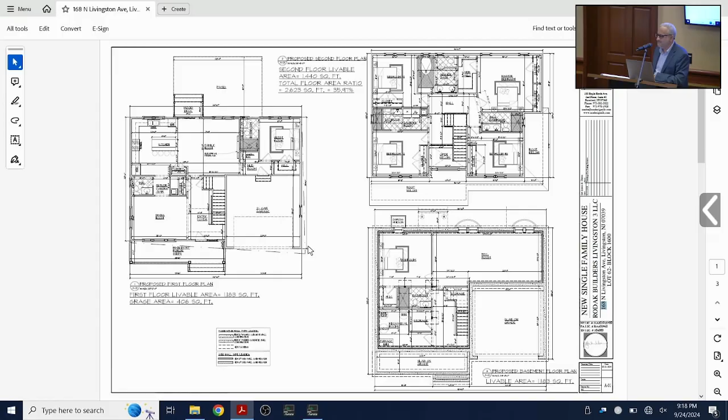That's it. And one quick question regarding the attic itself. In your expert opinion, it would not be habitable, correct? Correct, yes. Can you walk us through why, aside from the fact that it's a pull-down?

Can you walk us through why it would not be habitable? Because we don't have egress access to that. There is no stair that goes up except the pull-down stair. That is not an access to the attic.

And what would you say the pinnacle height is within the attic? The attic has a flat part, there is a collar tie. The collar tie is 5'7", and the height from the attic floor to the collar tie is 7 feet. Okay, but it's just limited to that one specific middle area? Just to the 5'7" in the center.

Terrific. I have no further questions for this witness. Anybody on the board have any questions for this witness? Anybody in the public have any questions for this witness? Okay, back to you, Mr.

Posada. Great, thank you. I'd like to call my last witness, my planner, Nick Graviano.

Would you be kind enough to state your name and spell it, please? My first name is Nicholas with an H, last name Graviano, G-R-A-V as in Victor, I-A-N-O. Mr. Graviano, do you swear or affirm that any statements you make and testimony you give to the board this evening will be true, accurate, and complete? I do. Please consider yourself under oath. Thank you.

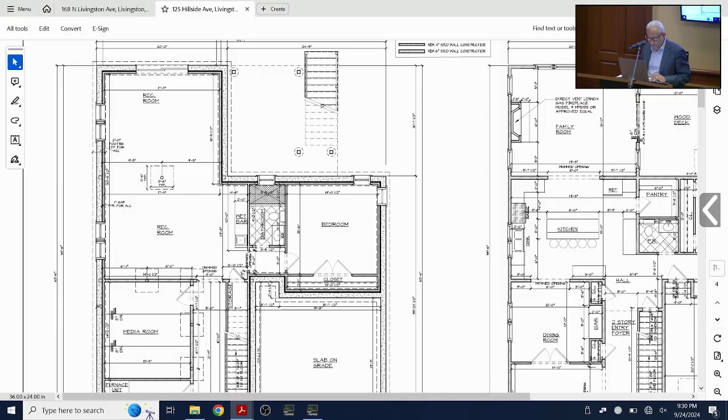Going back to the first floor, I forgot to mention that there's a wood deck with a sliding door from the family room and the guest room, and the wood deck has a staircase to access down to the grade.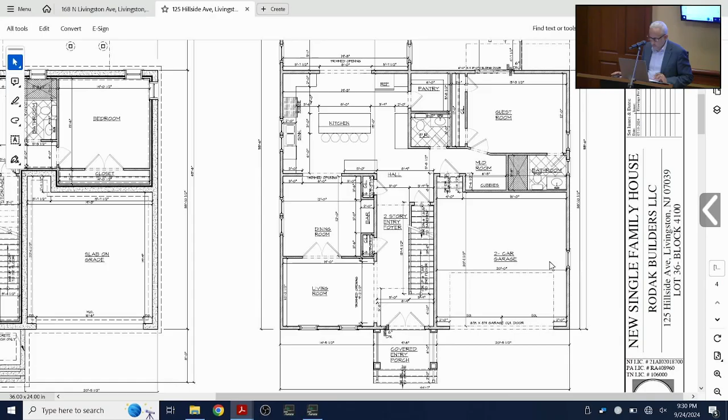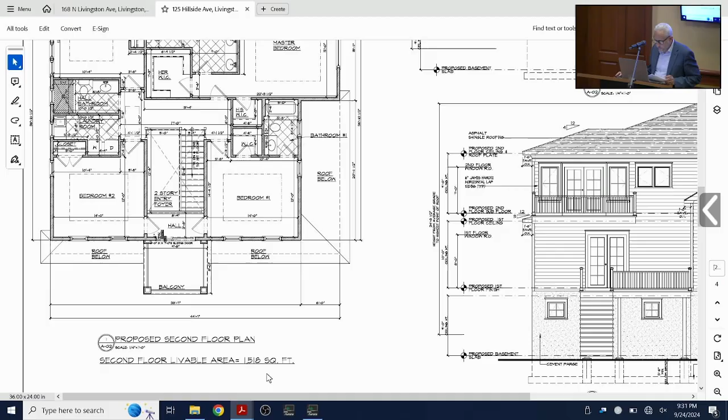This is the 2-story foyer, which is counted twice toward the square footage but only used on the first floor, and the square footage for this 2-story foyer is 62.5 square feet. The area for the second floor is 1,518. The total floor area ratio is 3,147, with a percentage of 25.99.

Now let me finish the elevation, and then I'll go back to the bulk table.

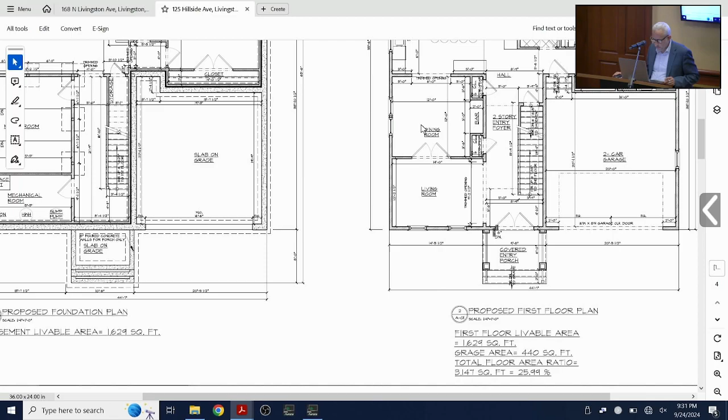The front of the building is a colonial style home with a stucco facade just at the front. We have a dark roof, white stucco, black windows, black standing seam roofs, and also pilasters at the corners of the building, just to control the transition between the stucco and the siding. The roof is just a hip roof.

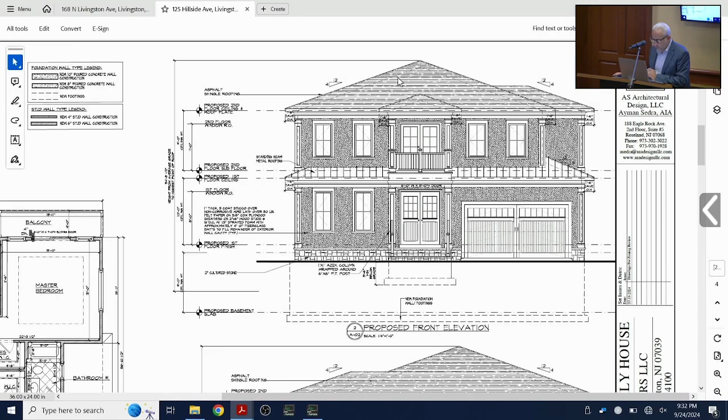The rest of the house, the rest of the elevations, are just James Hardie horizontal lap siding. This is the rear elevation. This is the access from the basement to the outside, and this is the family room window above. This is the right side elevation, again showing lap siding. And this is the left side elevation.

Going back to the elevation, the building height here is 34 feet, 8.5 inches. That's the building height from average grade to the highest point of the roof. We have 10-foot ceilings on the first floor, 9-foot ceilings on the second floor, and 9-foot ceilings in the basement. The attic is not a livable space; it's only accessible by a pull-down stair.

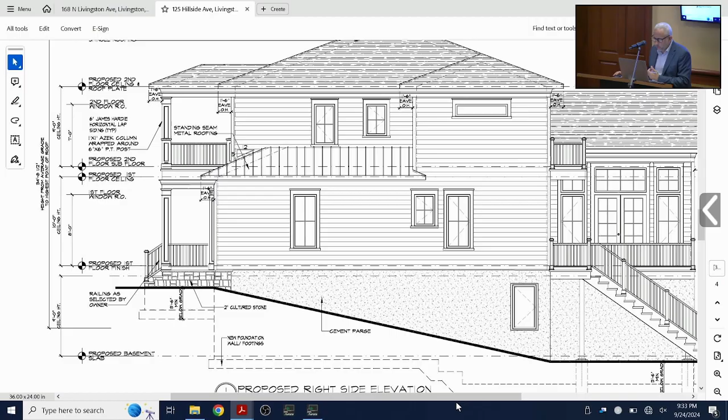The height of the attic from the attic floor to the underside of the ridge is 5 foot 6 inches.

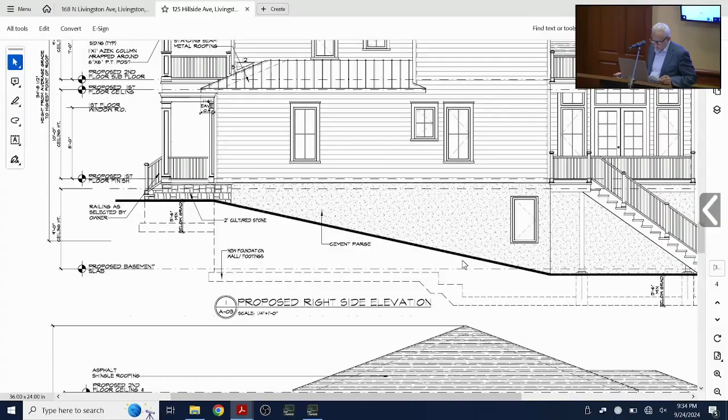That's it. And again, the attic is a pull-down, correct? Pull down, yes, correct, and cannot be habitable. No, it cannot be habitable. Terrific, I have no further questions for this witness.

Does anyone on the board have any questions for this witness? I have a quick question. If this was a full-size lot, would we have a problem with the habitable floor area ratio or not? No, we would not. That's solely because of the size of the lot. Yep, it's undersized by about 20%.

Anybody in the public? I have one question. Go ahead, please. On the floor plan for the first floor... wait, maybe I misread it. Hold on one second. Nope, I got it, I'm good. Never mind, I was looking here instead of there. I'm good, never mind.

Okay, once again, anyone in the public have any questions for this witness? Back to you, sir. All right, I'd like to introduce my last witness, my planner, Mr. Nick Graviano.

Yes, Nicholas with an H, last name Graviano, G-R-A-V as in Victor, I-A-N-O. You swear or affirm that any testimony you give the board, the statements you make before this evening, will be true, accurate, and complete? I do. Please consider yourself under oath. Thank you. Mr. Graviano, are you a professional planner, and is your license still in good standing in the state of New Jersey? Yes. Thank you, we can accept you as an expert in professional planning.

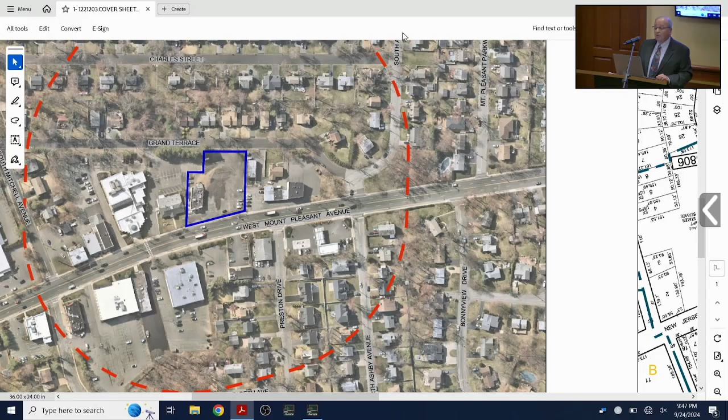Let's see, we want to get to the site plan. Oh, I gotta switch gears here for a minute. Come on. There we go.

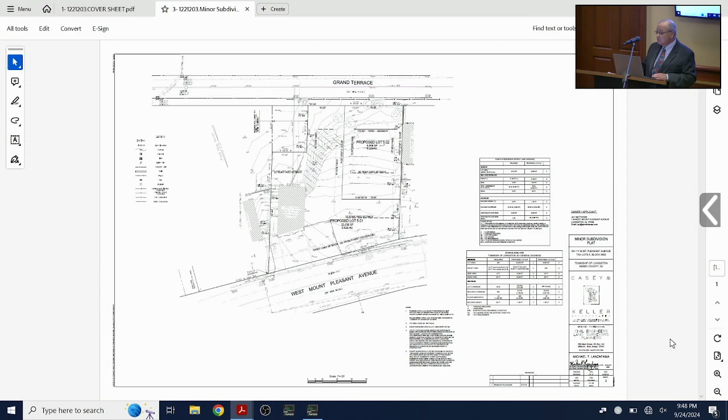The parcel that currently would retain the Jerusalem Restaurant would become tax lot 5.01, and that lot would be 22,630 square feet. It would retain its entire frontage along West Mount Pleasant Avenue, and the frontage along Grand Terrace would be reduced to just slightly over 50 feet.

The new lot that we are creating would be a rectangularly shaped parcel that would be 9,958 square feet. It would have a frontage of 79.65 feet and a depth of 125 feet.

This lot is consistent with what is permitted in the R4 zone. So the lot would have the appropriate width and size to support a single-family house that would be consistent with the neighborhood and consistent with the R4 zoning.

As far as the subdivision goes, it is fully compliant with the B1 zone criteria. There are no variances being sought with regard to the subdivision. What we are seeking is that the newly created lot 5.02 would be used as a single-family residence, which would require a D1 use variance because we're still zoned B1.

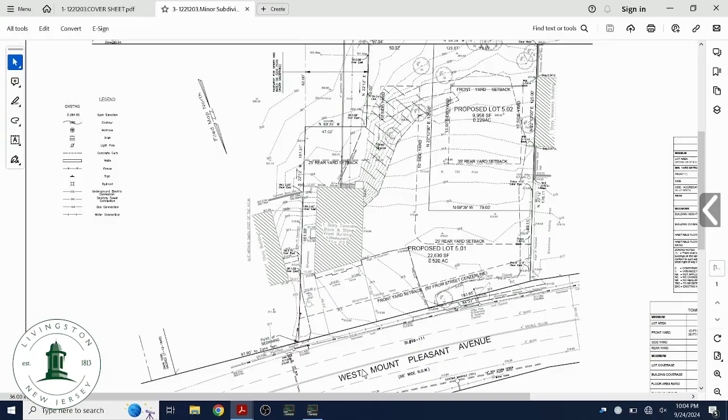So the building that's there was a restaurant, possibly to become a restaurant again. Yes. And there's going to be sufficient parking for this? Because we always run into a parking issue in this town. Exactly. It's my understanding that the applicant is looking for a new tenant specifically for restaurant usage. They're not looking to expand the improvement at all, and whoever that tenant is, they will have to come to the minor site plan committee and receive approval to ensure adequate parking.

As a follow-up to the introduction of residential onto the commercial lot, how would it be affected by buffering requirements for setbacks for parking? Typically where commercial adjoins residential, there's setback and buffering requirements, so would that impact proposed lot 5.01? The area immediately behind proposed lot 5.02 would require a buffer strip between the parking area and that new lot line, but there's still adequate depth to get a driveway and a row of parking in there.

Can you talk about the landscaping plan, since the house would abut this business? We can say on the record that we're not proposing any single-family home or improvements on the proposed residential lot, just the opportunity to build residential within the perimeter of 5.02. With that said, if found favorable by this board, we would agree as a condition of approval that the perimeter of proposed 5.02 would have both a fence and landscape buffering.

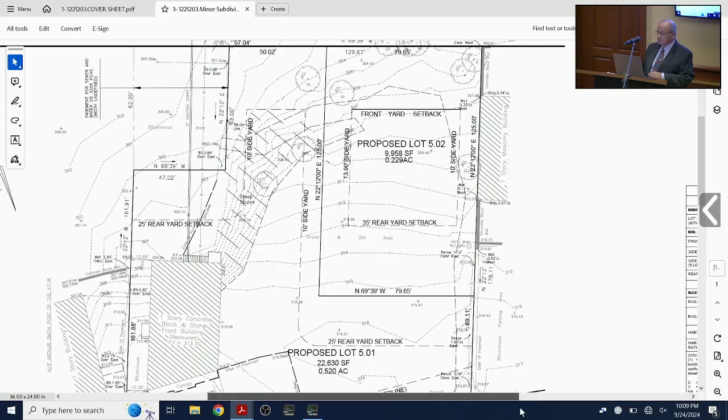Just for clarification, on sheet 3, where you show proposed lot 5.02, when you say front yard setback without a number, if you look at the table above, which is the R4 table, that shows the average setback being I think it's 31.65 feet. And that's based upon the two structures immediately to the west, because there's no other structures that front on that side of the street. So I used not applicable for the B1 criteria, but used the average setback for the R4 criteria listed in the table.

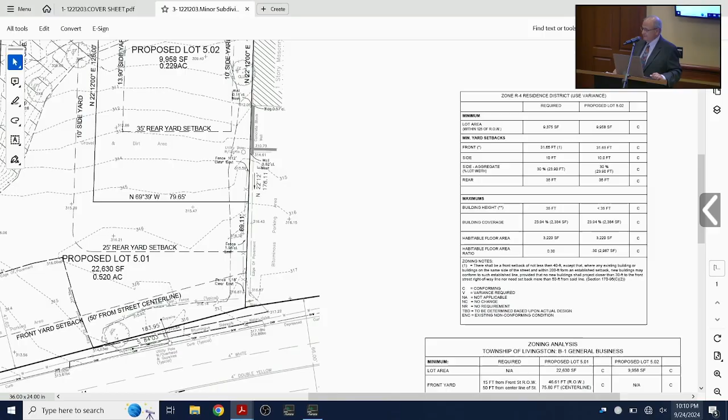And there's the 5.01 lot on the Grand Terrace side, the 50.02 feet opening - is that currently a driveway? No, it's just the remaining frontage. There's really no curb cut along Grand Terrace, but it looks like they brought the gravel right down to the back of the curb, and it looks like trucks are driving over it without benefit of a curb cut.

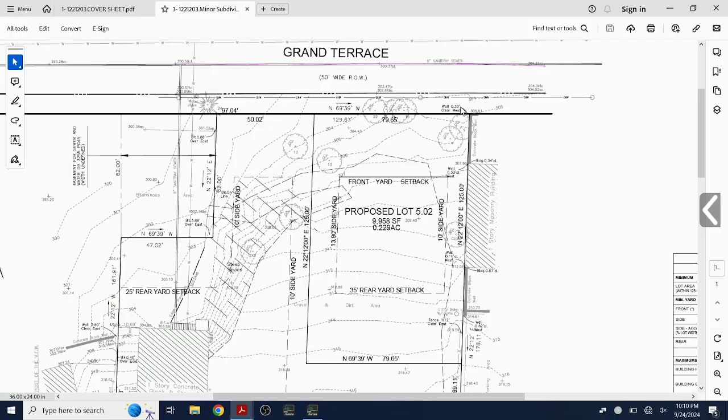So in the eventual plan, you'll have to provide a curb cut if he wants to use that, with adequate width for the driveway site plan. Or make that side look pretty too, but I guess we can't testify to that. Just thinking out loud.

Okay, I got a question. Right now, the cars are going from Mount Pleasant up and down in the back, going backwards to Grand Street, the Grand Terrace. Is that going to stop? Are they going to still allow the cars to go down? It looks like they're doing it now, yes. But eventually, are they going to stop? That would stop, yes. It's a cut through.

That's kind of a cut through. Yeah, I've done it. That must have been done recently, because years ago we did plans for this property, and that was not the case. No, I've gone to the restaurant when they were open, bought the food, went down the other way, right out. Just wanted to escape from my wife.

I do have just a question for clarity, because I know if this goes for approval, there's no house or nothing yet, it's just really about the subdivision. So are we saying that if we vote to approve the subdivision, that it's contingent that the subdivision plot will meet all aspects - I know it's not an R4, it's really a B1 - but are we saying this is approved with the condition that whatever is built there will meet all R4 criteria without any variances?